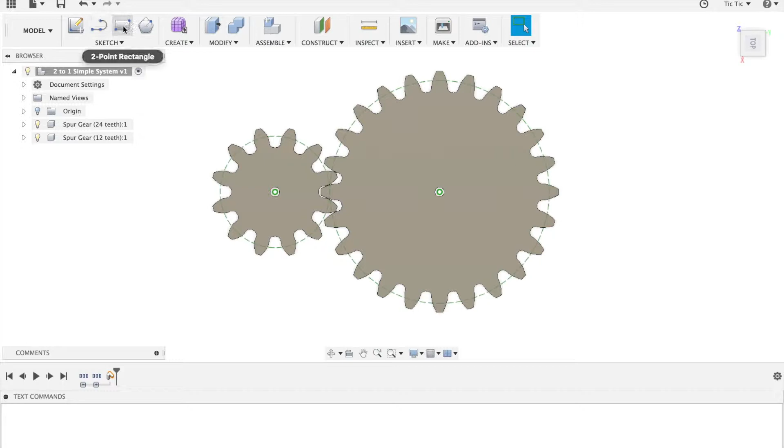I'm going to press R for rectangle, or this model point up here. First things first, I'm going to do it on the big cog. I'll make sure that part there is highlighted and click on this. It now takes me to a view, and you notice it rotates at a strange angle. I'm basically going to roughly draw out a rectangle that's going to go around this.

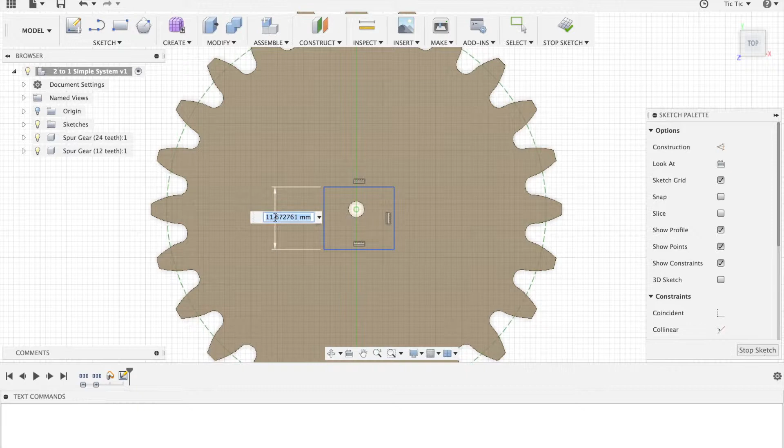I'm now going to go to the dimensioning tool, using D from now on, which is down here with a shortcut of D. I'm going to pull out this one to be 10 millimeters, not degrees. I'm now going to use this center point from here to here and set this distance to be 5, which is half of 10, and do the same here.

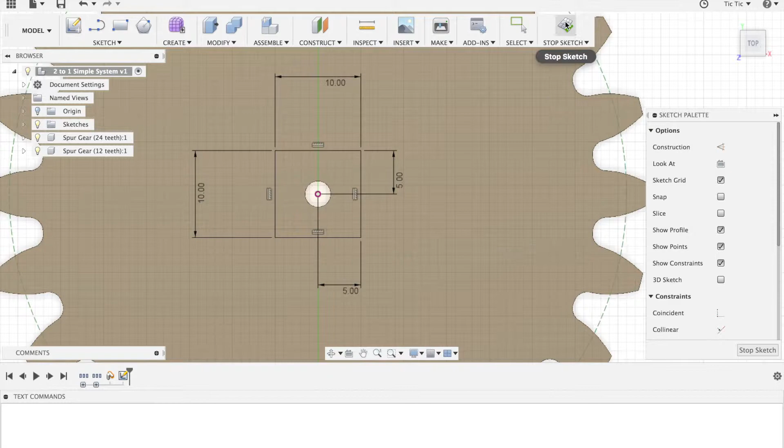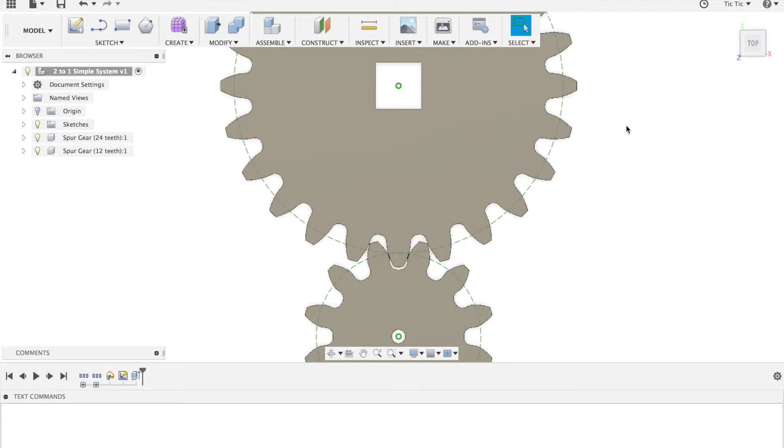We now have our axle at a perfect center point, so I can go stop sketch. If I press the home button, it'll take me back to the view I need for that particular movement. I'm now going to press the modify button, pull that right through, and press OK. I now have a square hole through which my axle, my 10mm by 10mm wooden axle, will fit and drive the cog.

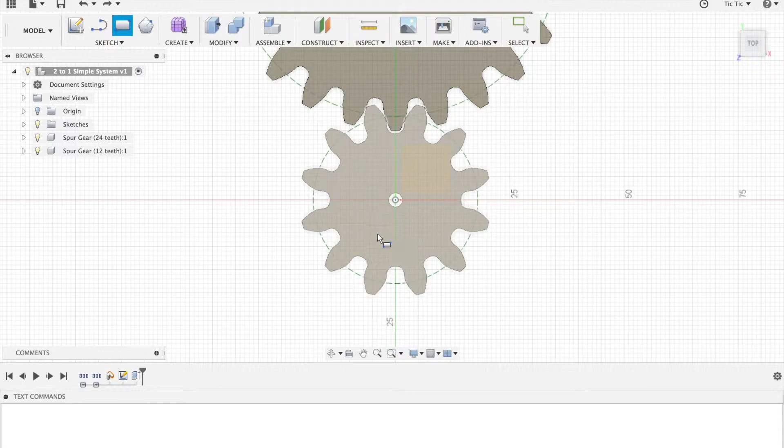We'll do the same thing on this side: rectangle. Click on that particular shape. Make sure you avoid, I'll press this and go back again. When I press R for rectangle, make sure you avoid that orange square there - that orange square is a plane, you don't want to put it there. You want to put it on this surface over here, which is the surface of the cog. You'll notice it turns at a slight angle. We can fix that by just pressing this button here, and it'll take us to a nice right angle.

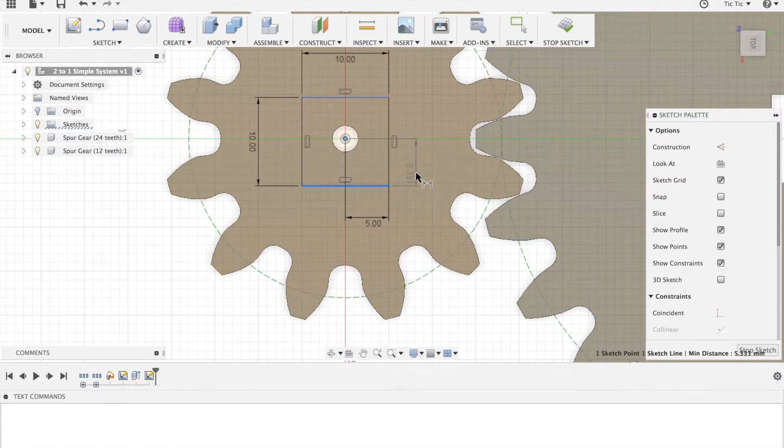We're basically going to put in another square. This is going to be 10 by 10. Now we can type in 10, tab, 10, and press enter, and we won't have to worry about those dimensions - it puts them on automatically. I'm going to now press the dimension from this point here to this point here to be 5mm, and this one here and this one here to also be 5mm.

Now I'm going to press stop sketch. I'm going to press modify, and pull that through to be -12 as well, so that I now have 2 square holes. Now that I can see my square holes, I can model my uprights.

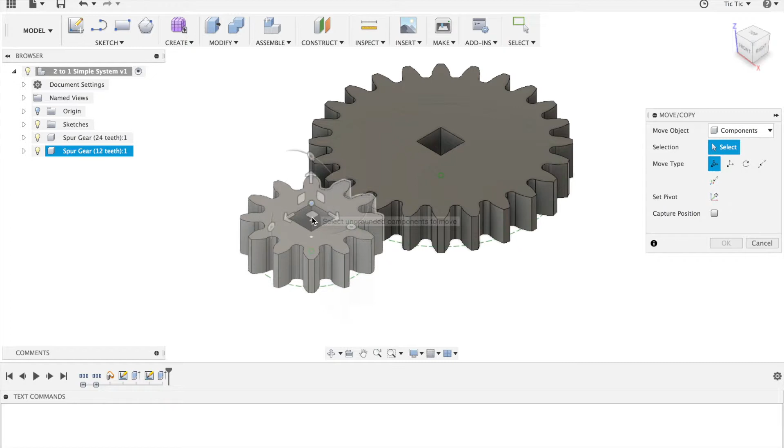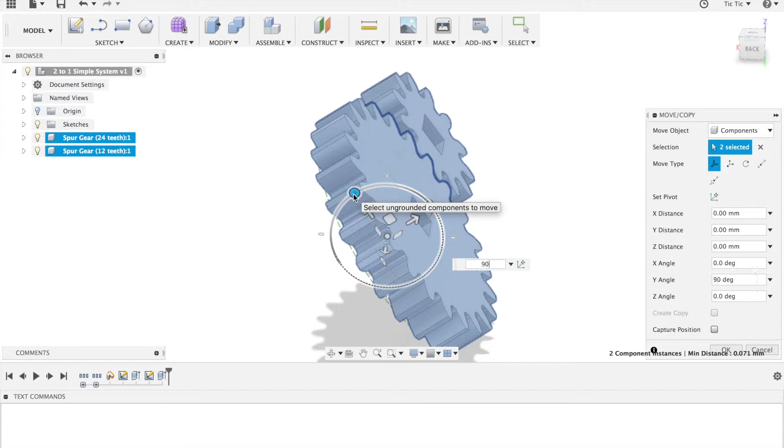But you notice when I press the home button, both of these are stuck at 90 degrees to what I want. I want to put this in a nice upright phase. So let's press the move tool. If I move this one first, it's going to rotate funny because I've already rotated it 90 degrees. What I'm actually going to do is press on that part there, on the big one that I didn't rotate to match the cogs, and then press this one here. Now I'm going to choose the one that rotates it around, which is this one here, and rotate that 90 degrees, which will be fine, and press enter. Now when I press the home button, they are upright, so now I can model them in the upright fashion.

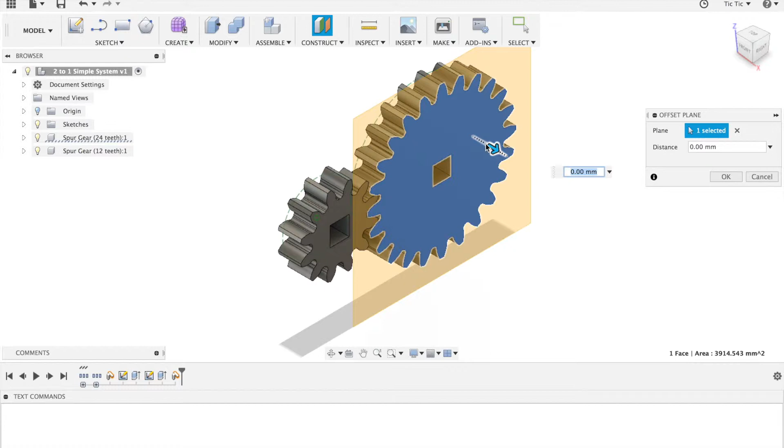I'm going to use something called an offset plane, that's in construct, offset plane. I'm going to capture these positions now, click on this plane here, and offset it by a bit more than 3mm. The reason I'm using 3mm is because my washers, which hold the cogs apart from the uprights, are 3mm thick. So let's choose 3.5mm thick, which will reduce our frictional issues. So 3.5mm out from this cog, I'm going to model an upright.

I'm going to use a rectangle to do this, and I'm going to click on this new special plane that I created.

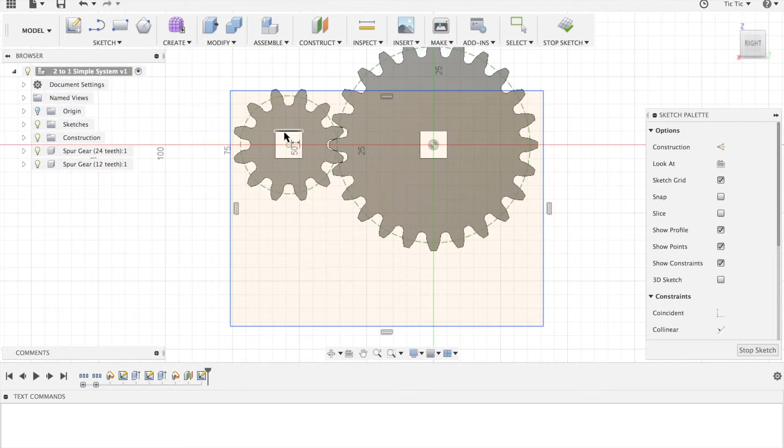I'm now going to create a big rectangle. It's going to be above the square holes and go below the actual bottom of the cog. So I've got them above the square holes, and below the bottom of the cog. I'm going to do a dimension now, choosing this point and this point, and make it at least 15, a nice round number above. Now I'm going to use the dimension of this little guy here and this line here, and go with 30 below.

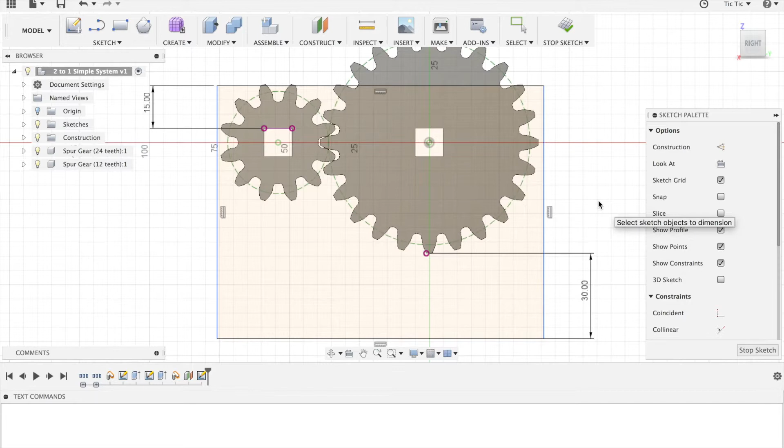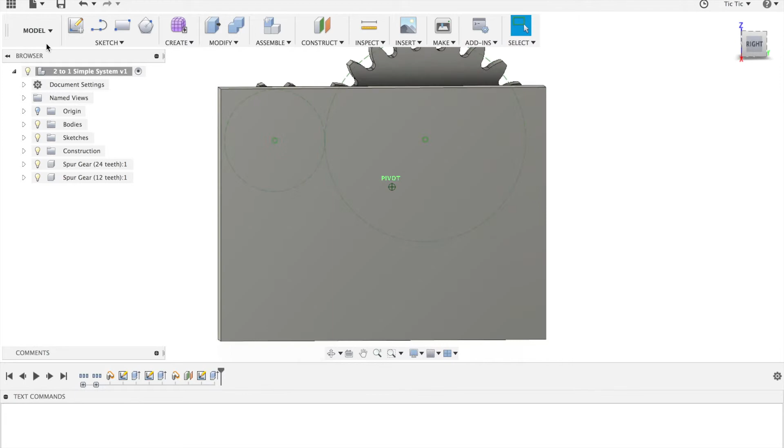That'll give us the heights we need. This is basically going to be my upright. I'm going to hit stop sketch now, press Q, select that whole rectangle, pull it out 12 millimeters, and press OK. That is my upright. So my upright basically is going to sit right there.

I need a hole through my upright with which to rotate my square axle. So what I'm going to do now is create another sketch, using the Create Sketch tool, on this particular plane here. It's now got me in sketch mode.

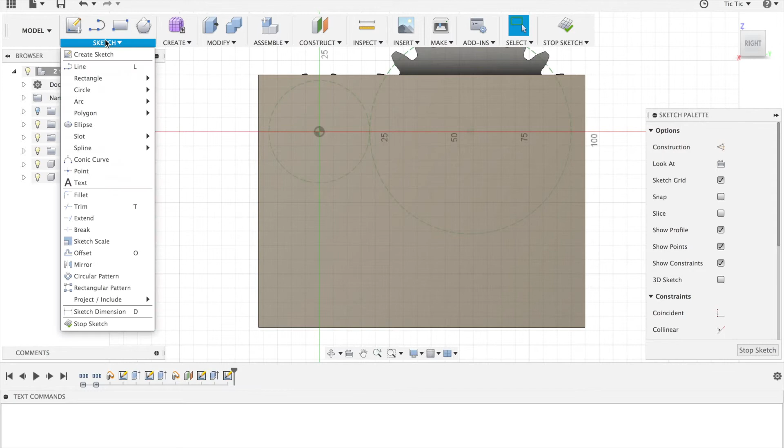I'm going to use a special tool called the Project tool. If I go to Sketch, we can see the Project tool is not easy to find. It's best found by pressing P, and what it means is I can project other shapes onto my sketch. So I'll press P to use the Project tool, and select 1, 2, 3, 4 off that one, and 1, 2, 3, 4 of those square holes there, and press OK.

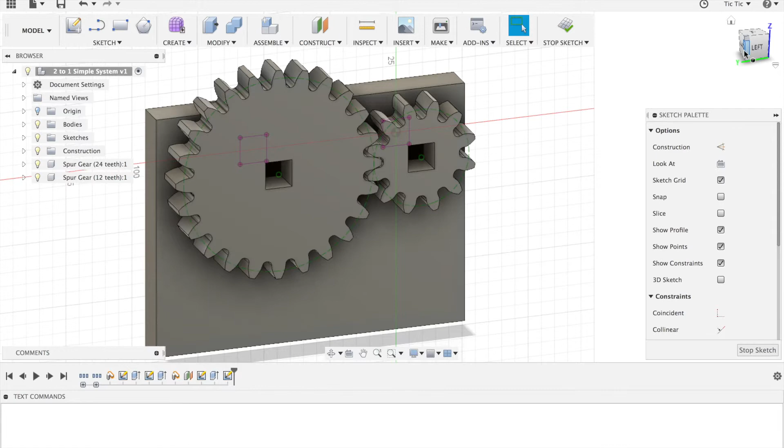Now if I go back to my sketch, there it is - I can see I've got those holes there. You can also see I've still got that little circle coming through from the sketch on the cogs. I'm going to use the circle tool now, start at the middle and go out to here, and I can see it's 14.1421. I'm going to set my dimension to be 14.2, just so it's big enough to go through that.

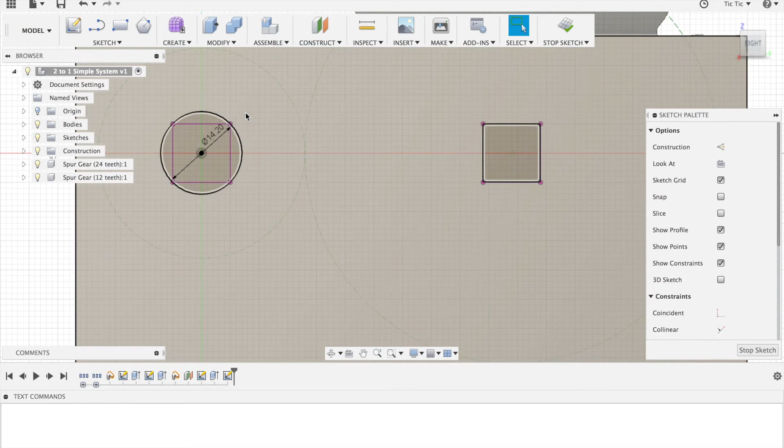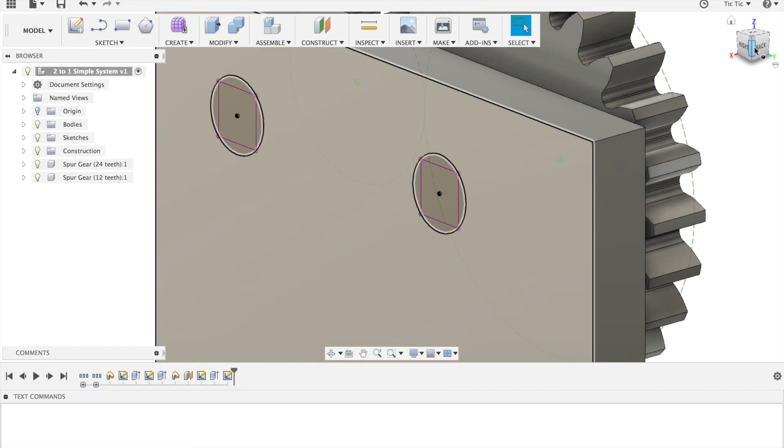I'm now going to press the same thing again, C for circle, and draw the same one here, at 14.2. I'm going to press stop sketch, and those are what I'm going to push through. So I'll go to modify, select that and the outside, and this and the outside, and go back -12 to go right the way through. So you can see there my cog goes right the way through, and I've got circles on either side.

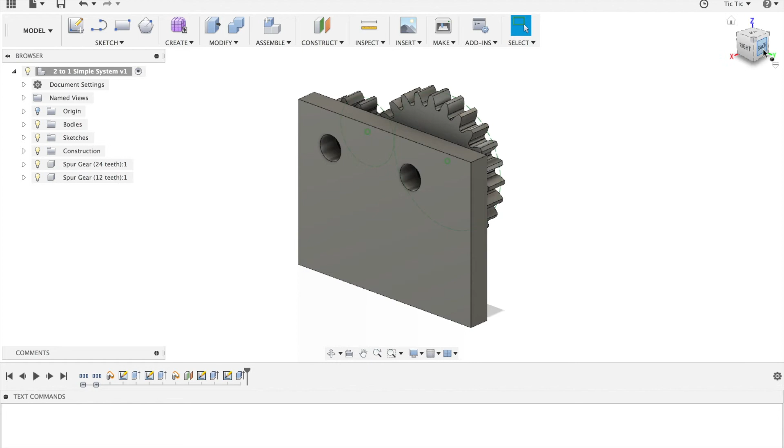The final thing I need to do is use a mirror command. Now if you're going to make yours look more attractive and change it so you can see the workings of the cog better, you need to do that now before anything else. But make sure you leave a 12mm section down the bottom. What we're going to do first here is mirror these from one side to the other.

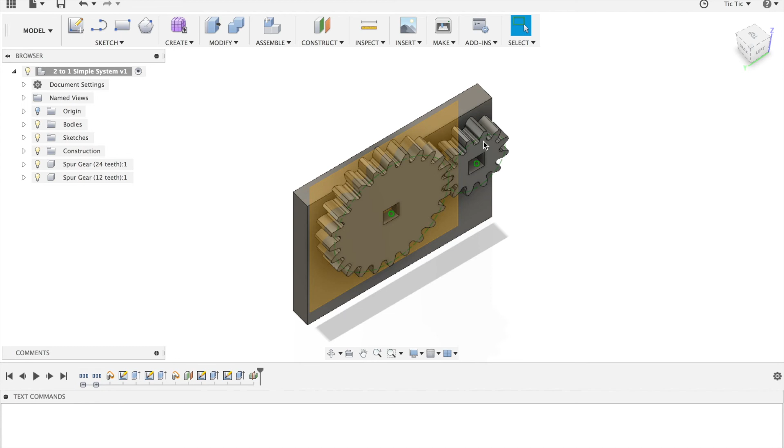I'm going to do this by creating a special type of plane called a mid-plane. The mid-plane is going to be between this side of the cog and this side of the cog, and you can see it creates a plane perfectly in the middle. I'm now going to use that mid-plane as a mirror point. So I'll go to create, mirror, and mirror a body - that would be this body here. I'm going to select the plane I'm going to use, which is that mid-plane, and press OK. And you can see there my other upright is now ready.